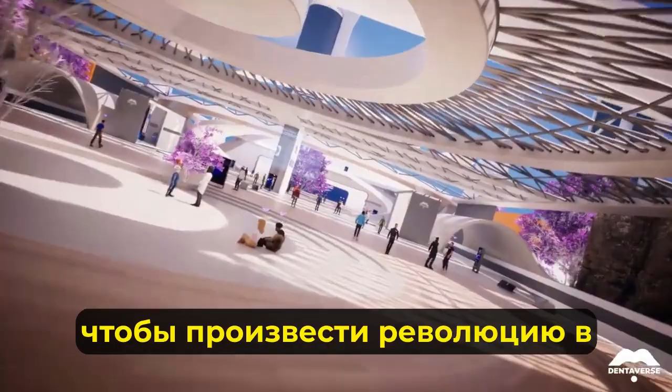DENTAVERSE, a place where professionals come together to revolutionize the dental industry. Embark on a journey of lifelong learning and professional development.

Follow virtual classes and practice on interactive simulation units. Be part of the inclusive global dental community. Meet the pioneers of the industry and exchange ideas.

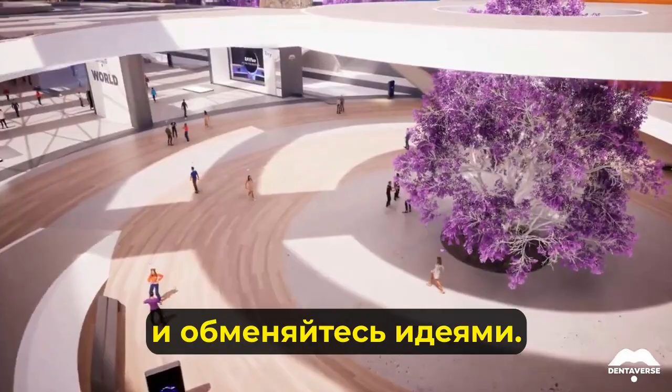Attend virtual scientific conferences from the comfort of your home. Discuss breakthroughs in the dental world.

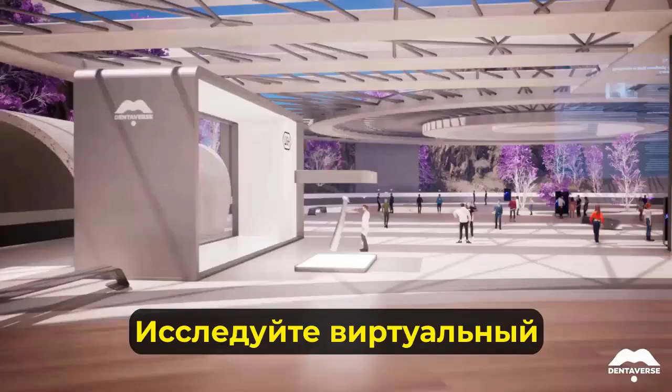Explore the virtual showroom. Connect with suppliers and find the best solutions for your practice. Access our research platform.

Visit our virtual clinic and consult with your patients from anywhere in the world. Examine and analyze your patients' results in an immersive dental lab environment.

DENTAVERSE may be virtual, but the impact will be real. Build a better future for dentistry. Join DENTAVERSE today.

You know what, so I will look and I will try to change the slides, okay? Yeah, you can just tell me if you want me to change them. No worries, no worries. If there is any problem, I will let you know.

Okay? Yes, so I will start. What do you think? Let's go. Ready to rumble? Ready to rumble.

Just maybe give a quick introduction to yourself. Definitely.

So I would like to welcome everybody. After this small technical glitch, we are ready to rumble, just like Jan said. I would like to start with a presentation because maybe you don't know me, but this is the very first time for me to do this type of virtual presentation. So, historical moment.

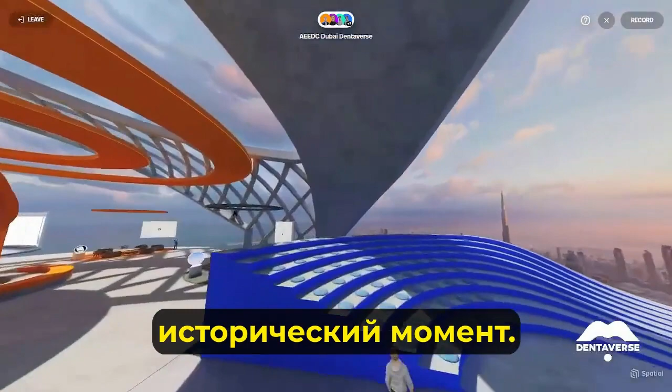Okay, this is my CV. I'm not sure you see that, but if you check all these things, you can see that I'm coming from a very small town from the countryside in Hungary. My father was a dentist, and

one of the main reasons why I like to talk about my history, my past, is because I would like to show you the way, how I did it. That from nowhere, I was able to travel all around the world, and I was able to work and do something unique.

Hopefully, by the end of my presentation, you will see this, or you will feel this, just because of digital. So my father was a dentist, and as you can see, I decided quite early that I want to be a dental technician.

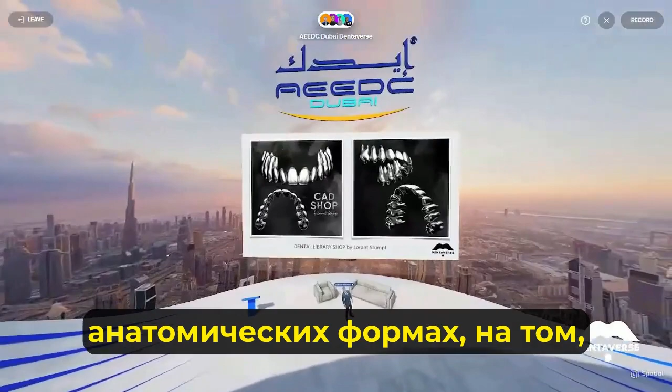Please don't forget that this is a very small company, a one-person company, so I'm responsible for all these things. That's why it's important for me to find a perfect communication channel with everybody, based on the shapes, the anatomical shapes I'm using, and I will show you what type of natural shapes I'm using.

I also made a special online shop where you can buy all these high definition natural shapes. I will talk about more details in the middle of my presentation, but this is also easily - you can easily bring to the metaverse and use these tri-dimensional files in the future.

Let's go a little bit closer. So I'm able to change the slides. Okay, one of the main things I'm focusing on at the moment is bringing my virtual designs to a high definition level, and that's why I started creating this type of CGI visualizations, this type of photorealistic renderings

in the end of each step, just once again to show the clients what I'm thinking, how we can provide the final restoration, what is the level we need to provide.

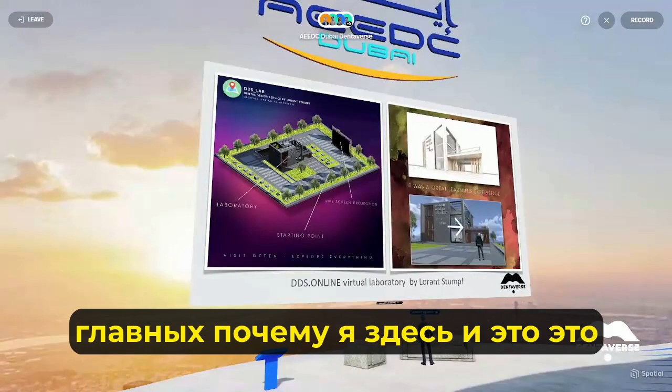So as you see, I'm doing all types of things regarding digital dentistry, but one of the latest and main things - why I'm here, and this is the space where we met - is my virtual laboratory.

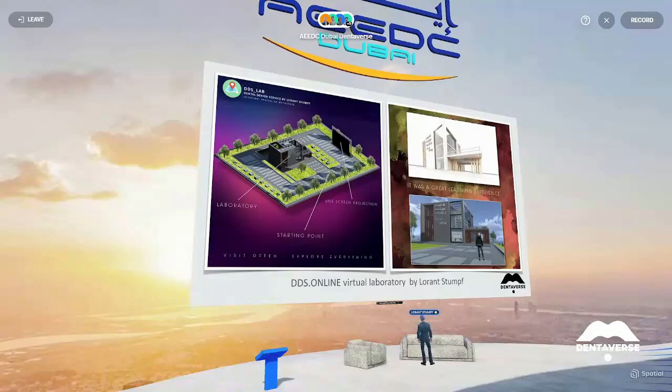It was very strange for everybody in the beginning. That's why I'm forcing and bringing my virtual experience or appearance to a special place. But how I see it,

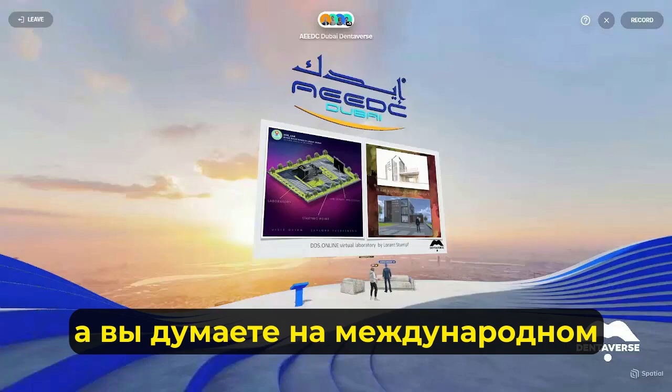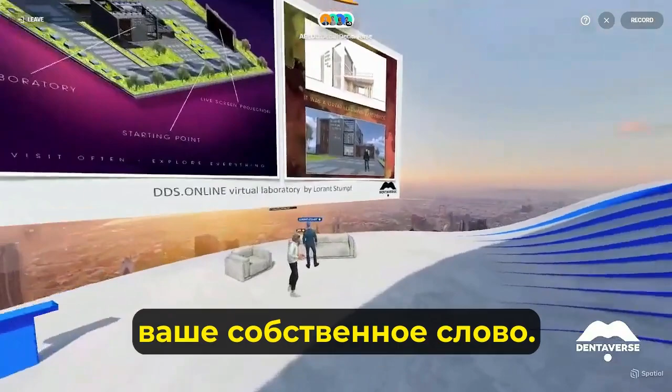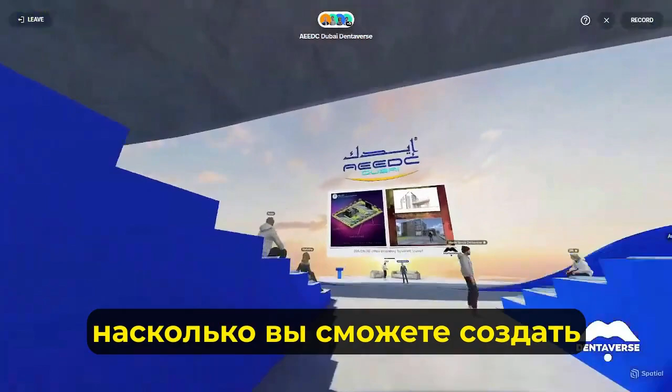this is a huge opportunity. Depending if you are thinking about worldwide and thinking internationally, definitely you need to create your own space, and you need to create your own world, and this will help you absolutely in the business, how you can create a way of business where you can find your partner.

Okay, let's see another slide.

As you see here, I took some screenshots from the laboratory just to explain this to you, and this is my suggestion to you as well. If you are thinking about creating a virtual space, you need to cooperate with professionals here in DENTAVERSE. If you are part of the community, you can find the perfect professionals for this type of job.

I'm absolutely sure I found a different way because I started quite early, and I went through all the steps of how I built it from scratch.

As you can see, on the ground floor I already made a presentation room for several lecturers, because I truly believe that you need to educate people. You need to explain how you are thinking about the way you want to create a dream smile, let's say.

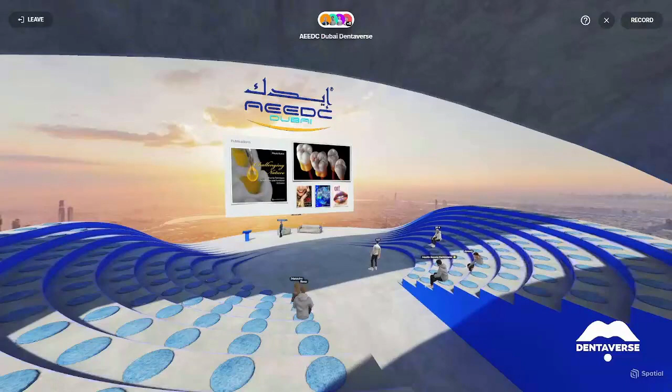He made several publications and reached the highest level in aesthetic dentistry, then he started working digitally, and I was able to learn from him. I never forget this moment when I realized we need to think absolutely differently, and that's one of the main messages I'd like to share with you.

Just some analog wax work from him. You see he knows exactly how to imitate nature, and he started focusing on how to copy nature, and it was a different project.

One of the main things I never forget is the main message we try to understand: you need to think, because everybody has his own way of working. That's absolutely normal in dentistry. Everybody learns something, people go to different types of courses depending on what they want to learn, and that's totally fine.

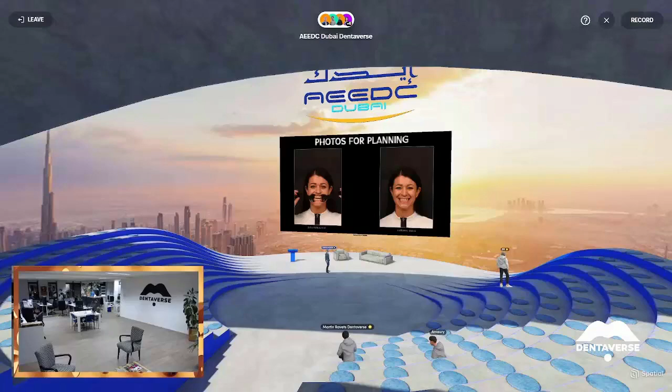So for designing a smile, definitely you need photos from the patient. This is not a new thing - everybody is taking pictures, everybody is scanning faces. But you need to understand, when you or your designer or somebody in the dental laboratory - if you are a dentist doing the design - it's extremely important. And I know that in Dubai right now there are plenty of companies advertising this type of protocol.

Please pay attention to this, because taking a photo or a 3D scan is extremely important for the 2D planning, but the head position - also from my experience - is very, very important and critical. When people always ask me, 'Lorant, but if my pictures are not okay, what should I do?' I ask them to always think about the smile frame, these outlines, and always check the head position.

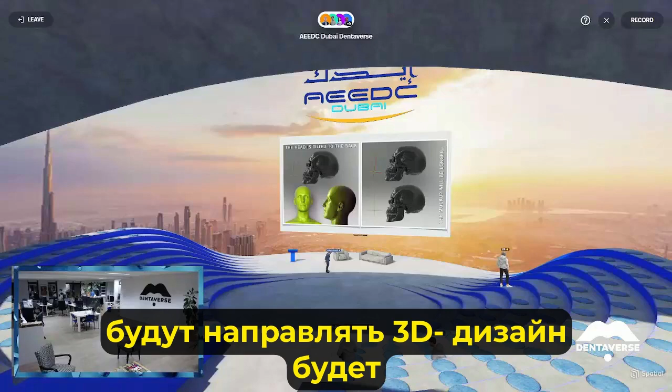You need to understand that if the head position in the photo is angulated, the 2D planning - which will guide the 3D design - will be fake, not valuable. Always, when you are taking pictures from the front, check the head position from the side, because you can see in the right side of my slide what will happen if the head is angulated: your design will be longer or shorter than in the normal head position.

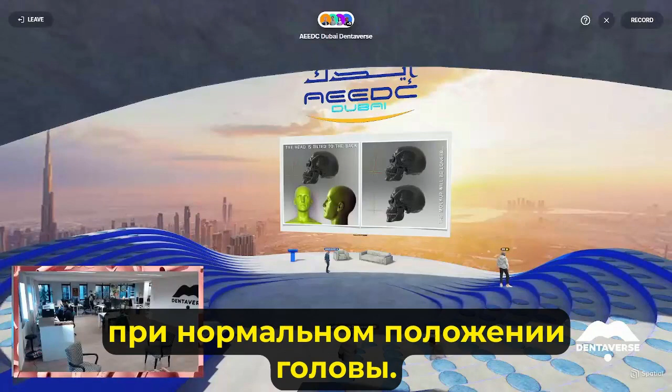Please pay attention to this. Initial scans, because we already delayed.

I don't want to go into details regarding scans, but believe me, once again, I'm not against companies. I have an extremely good relationship with all the good companies, startup companies, but...

Scanning is very, very important. Face scanning, surface teeth scanning, surface scanning is a very important thing. You need to practice, because you need to understand how the scanner is working. The surface can be easily distorted, and this can generate problems in the future because your design will not match properly.

So here we created an upper and lower full arch restoration, and that's why you see the gap between the upper and lower - because we already defined the ideal occlusion, the space between the upper and lower arch. And just like all the time...

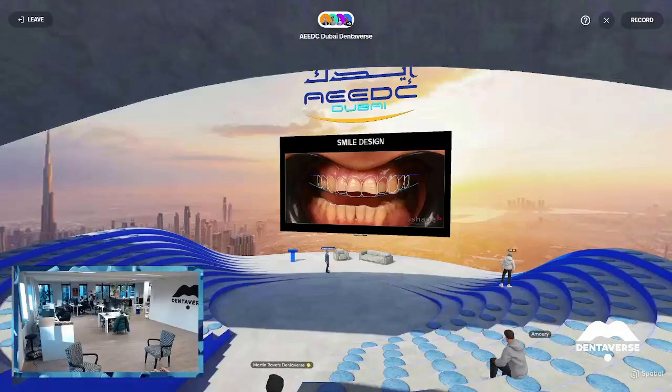I started with the smile design. I was able to work together with the DSD team on the world tour. Please keep in mind that digital smile design, for me, is like a blueprint. It's not a selling tool because the patient doesn't understand these lines. It's a very good way of communicating with the team and guiding you for the design. That's why it's important to have a non-angulated photo.

Just giving you an example: if you want to design a crown, maybe if you select 'create me one single crown,' the better solution might be using a pre-design and converting it to a wax-up. I don't want to go too much into details, but this is how it works.

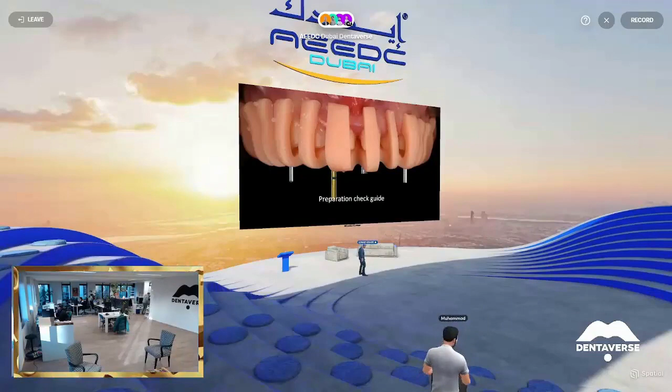Digital model works. Just a few things about what type of models I like to use, even if it can sound strange for dental technicians. To have full control, I'm always creating a special solid model. I always create the dies independently, and I'm creating a special model without gingiva.

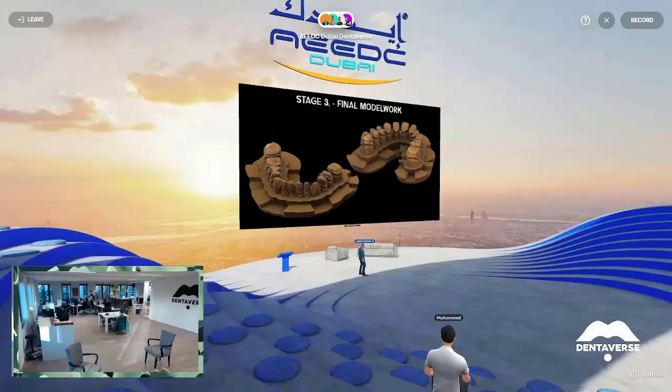You see why it's important? This is the master model. This is where, when everything is ready, you need to deliver the case. With this model you can check the contact points, check all the fitting, check everything, because all the dies are in position. And you have the independent dies, where you can check the fitting of the crowns or the veneers.

I know that you can easily generate an alveolar model, but believe me, if you go back a little bit and create this type of finalization, you will be extremely faster. The second thing is you will avoid all the problems coming from the precision of your alveolar model. Some people will say, 'I have a perfect 3D printer, a perfect milling machine' - that's totally fine.

Just I'm saying that even if I'm finalizing my cases with good printers and milling machines, I'm always following this, because this is how I have full control about finishing the case. This is the final visualization of the restoration.

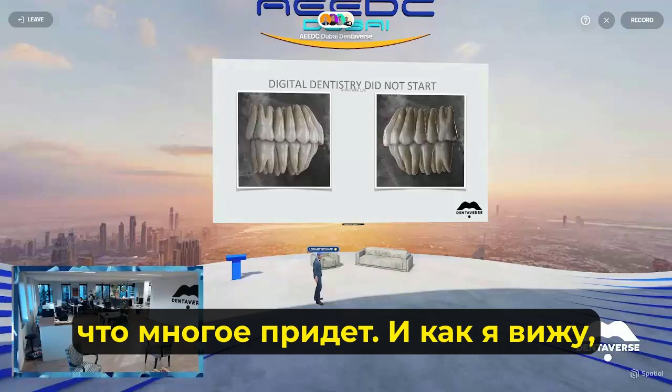So when this changes, the numbers will change. I'm absolutely sure a lot of things will come. Another important message from my side is that you need to understand there are two types of CAD technicians in the world.

Operators, who know where to click on the software, how to pull the trigger on the software, but normally they don't have the experience that all technicians have. So these are the operators. And then there are the designers who can work alone, who based on the information, the input, and the level of communication, can create something unique and of high value for the customers.

How I see it at the moment, old-generation dental technicians are investing much more in CAD/CAM dentistry than the dentists. They're looking for young people who are able to operate the software and the milling machine, because they are afraid they don't know, and this is too futuristic for them.

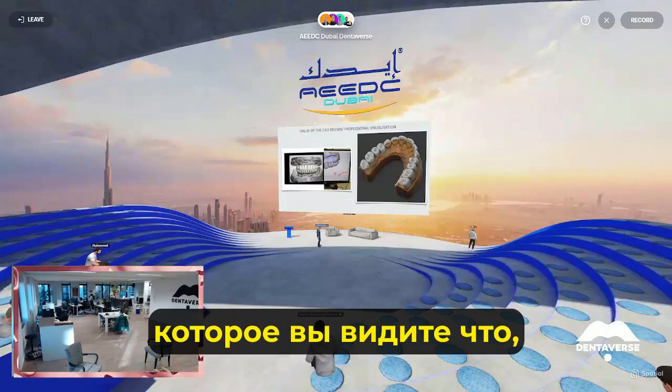So this is how I told you plenty of times, Jan - education is also the main thing in the whole story. So we are nearly at the end. Hope I didn't kill anybody with my story, but you can see, if you compare the communication, that if you bring value to your work, you will find your partners in the world.

But you see different CGIs.

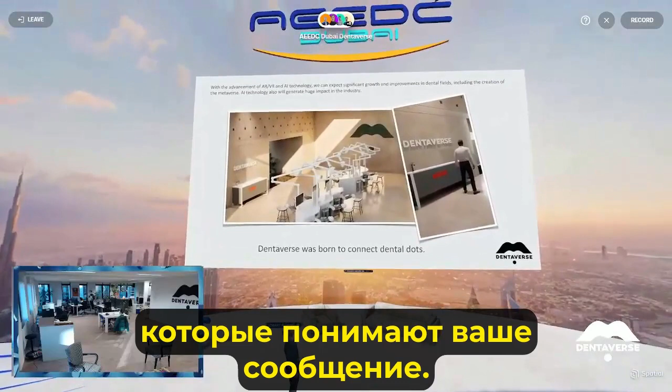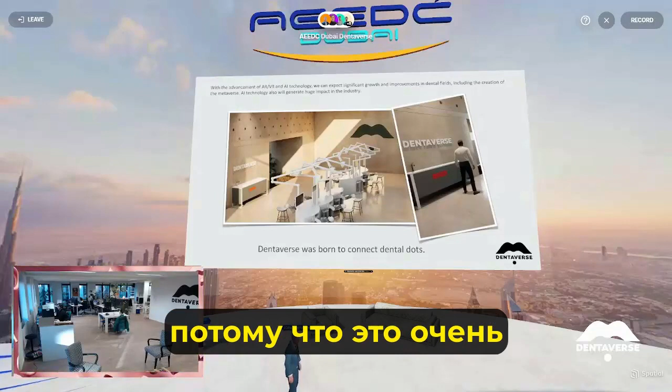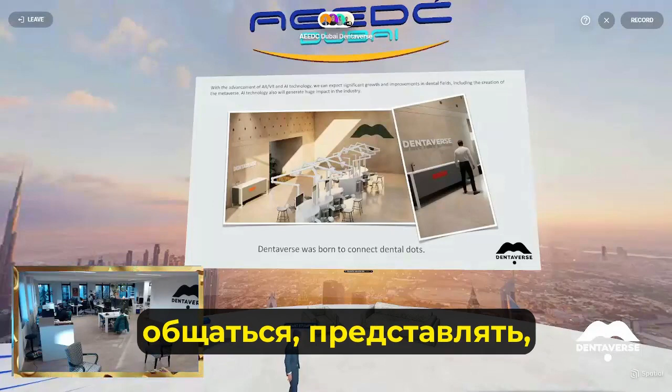The main thing is how you can represent yourself, where you can find the people who understand your message. That's why for me, when I found DENTAVERSE, I saw that you are bringing so much value to the community. I'm extremely proud to be your ambassador and to be with you on this journey, because I see the potential growth of the whole system. I recommend everybody join this, because this is much more powerful than any other way of learning, communicating, presenting, sharing your knowledge.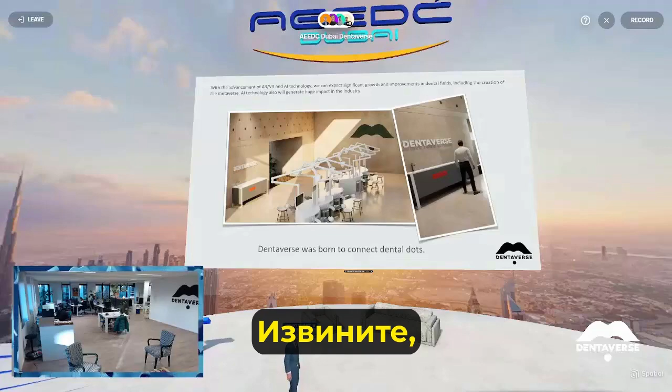So I'm extremely thankful to you for your invitation. Keep in touch, I'm here for you, so you can ask me anything regarding this topic or any other topic. If I know the answer, I'm much more than happy to answer. Hopefully my message, from the countryside, the small guy who had a dream that somehow I will combine computer games with dentistry, it went through. I was extremely thankful and happy to be with you.

Yeah, no, well, thank you very much. For me,

It's super interesting for me, as a geek, to learn about how dentists have put technology to use. In your case, you used AutoCAD to design a 3D representation. So I think the first question I would have for you, Laurent, is in your career so far as a dental technician, how have you seen the world evolve towards this 3D, CGI, digital way of working, from the old analog way?